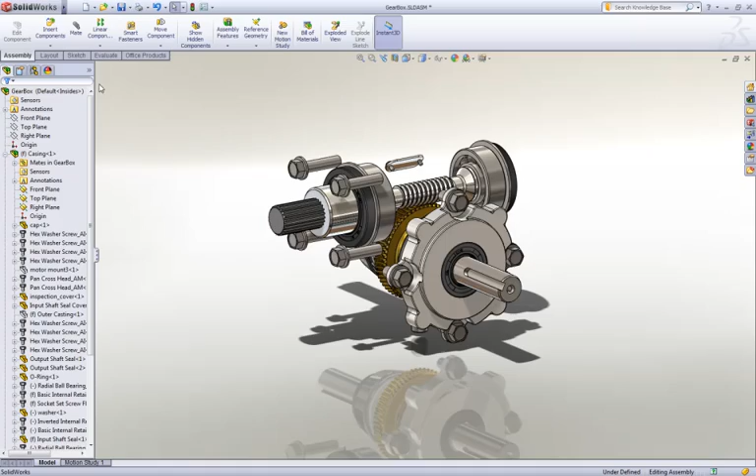Suppliers are always eager to have customers utilize their design work. However, customers don't typically need a lot of the internal detail of the design, and suppliers don't want to give away their intellectual property rights.

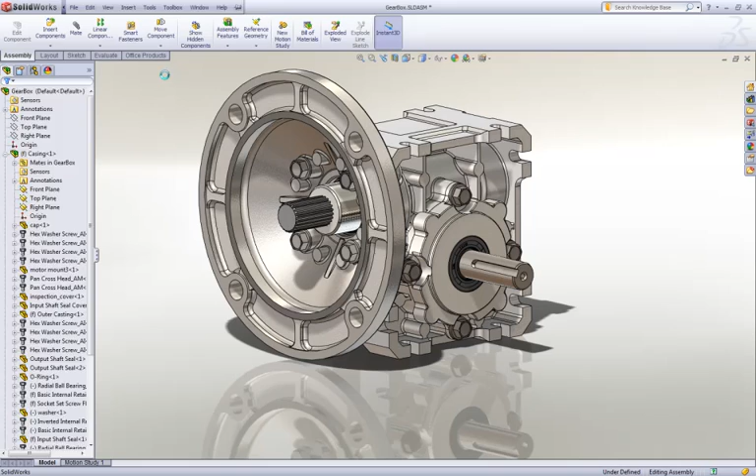So to make it easier for suppliers to share their content, we've implemented the Defeature tool in SOLIDWORKS 2011. Defeature allows us to automatically remove levels of internal design detail very quickly and efficiently. It can remove intellectual property, but also simplify the model and reduce the overhead.

We've got lots of options to pick and choose from. We can reduce the components based on their size, just take away all the internal components, or specifically select components to keep or remove.

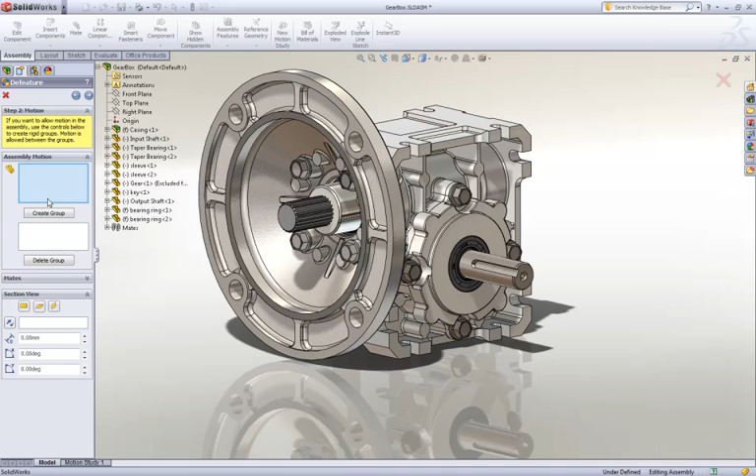One thing that's unique to SOLIDWORKS is the ability to preserve assembly motion. So we can come in here and select several of the components and group them together.

We're going to group the casing elements. We want to do the input shaft as a separate component, and then the output shaft. SOLIDWORKS will preserve the mate relationships between those components, giving us the movement as well as the visualization.

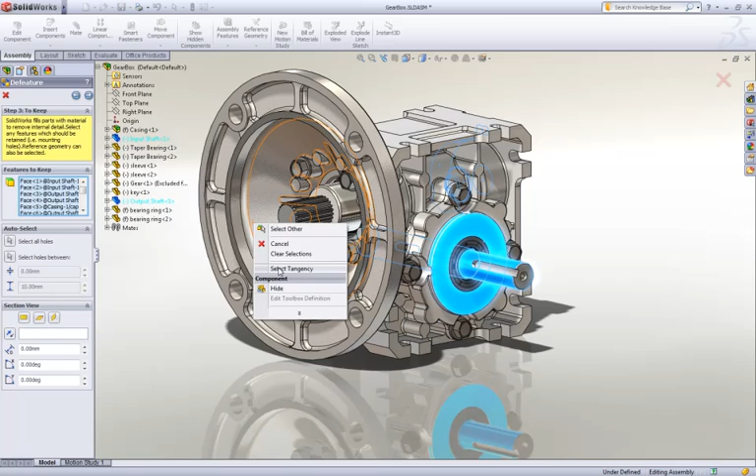Something else we can do is individually specify that we want to preserve certain features. For example, these mounting holes are very important to be able to hook up the gearbox to our system.

SOLIDWORKS will go through and, based on our selections, in this case remove the internal components which are enclosed within the geometry, as well as ensure that we preserve those features we've selected.

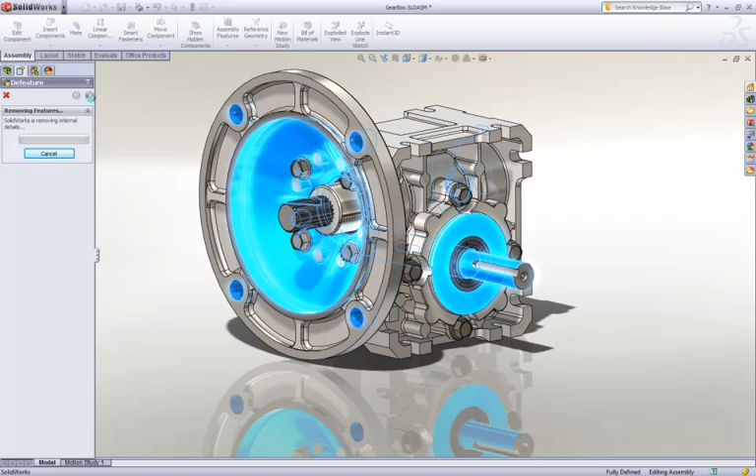It only takes a couple of seconds, but it does a very efficient job of cleaning out a lot of the unnecessary detail. We still preserve a lot of the external detail because that gives you visual information about what it looks like and ensures it fits into your design environment.

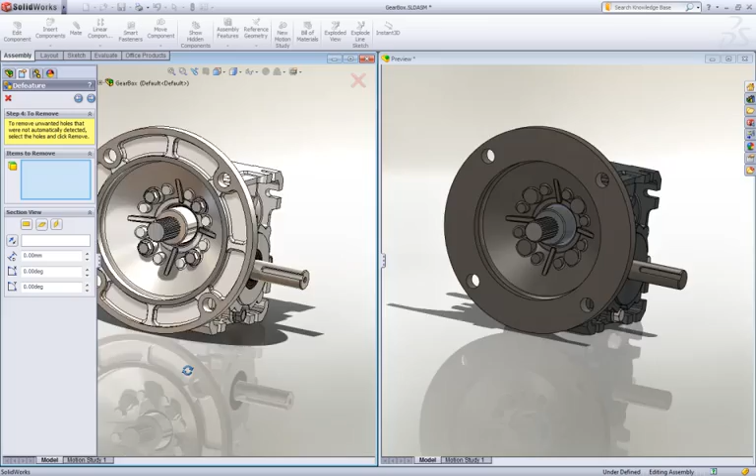So you can see here we have our detailed model and then the simplified model on the right. We can even do section cuts through the models to compare them.

You'll see very quickly that there's a lot of detail that's been cleaned out inside. It's all completely solid internally. But we do have our three components: the input and output shafts, and the casings.

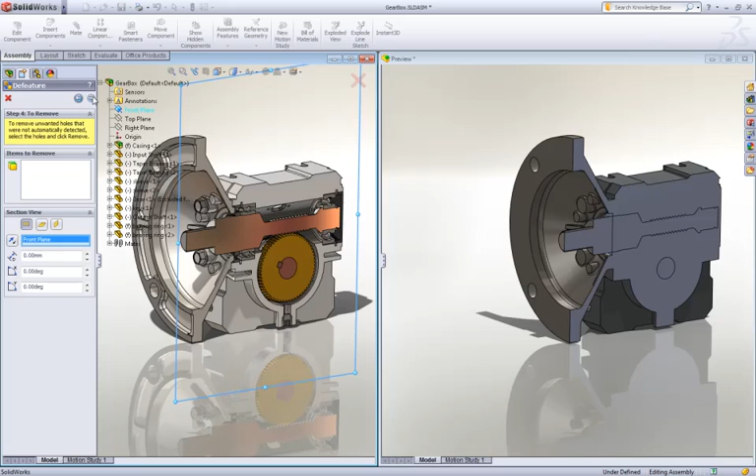We have several options. We can just save our settings for how we want to output it. We can immediately publish our model to 3D ContentCentral to make it available, as well as save the file out as an external file.

So we'll do that and update our simplified design. Because it's parametric, we can go back at any time and modify our settings to output the model.

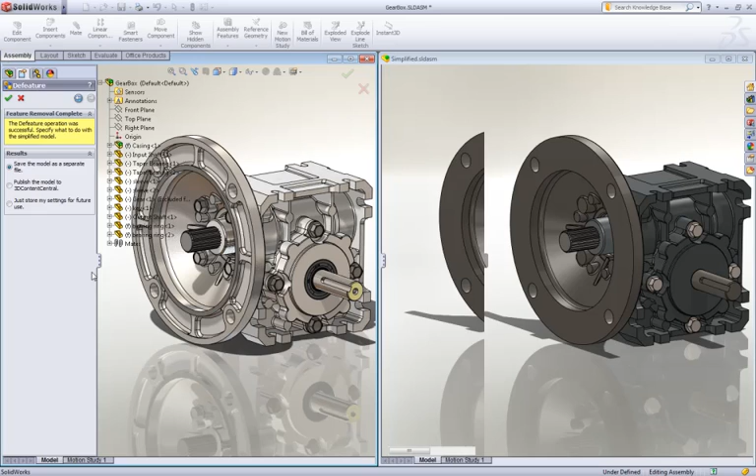So we have our Defeature object up here. If we want to go and output a new one, we can just go and edit the feature. You can see here we can also right click and post it to 3D Content Central as well.

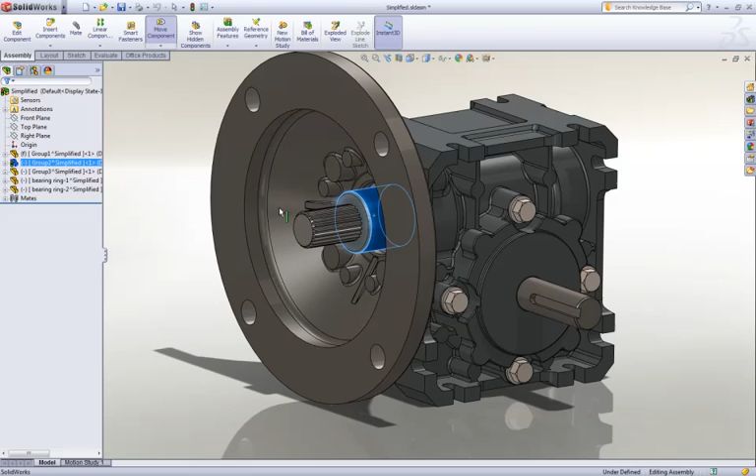Let's take a quick look at our defeatured model. You can see if we grab the input shaft, the output shaft rotates accordingly, so we have our mate relationships preserved.

As we saw before, it's a solid model inside, so it's very efficient and reduces the file size, making it easier for customers to ensure it's going to fit into their design, or to build around it very efficiently.

So that's Defeature in 2011.